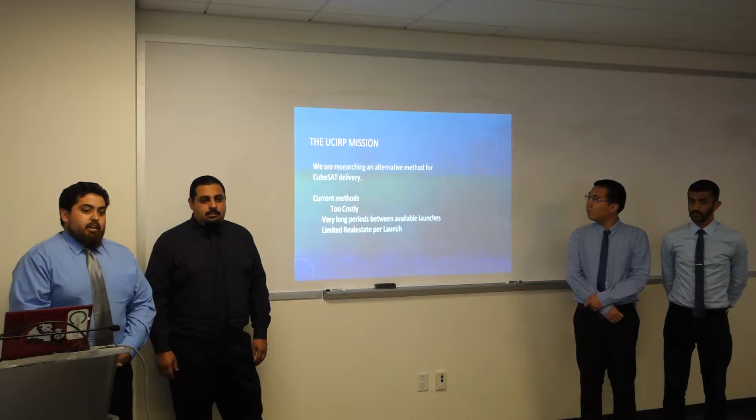Prior to other missions or other years, other groups would be satisfied with purchasing a solid engine and designing an airframe around that, then launching it for a tournament or a goal they have themselves, or for research purposes, such as what sounding rockets are for. But I wanted to make this mission geared towards more of a practical purpose.

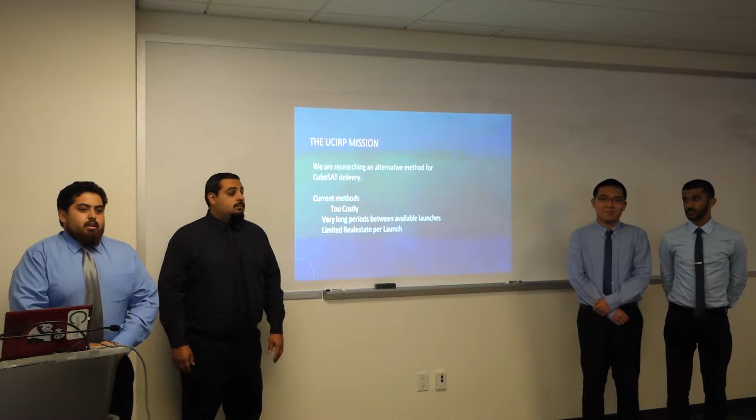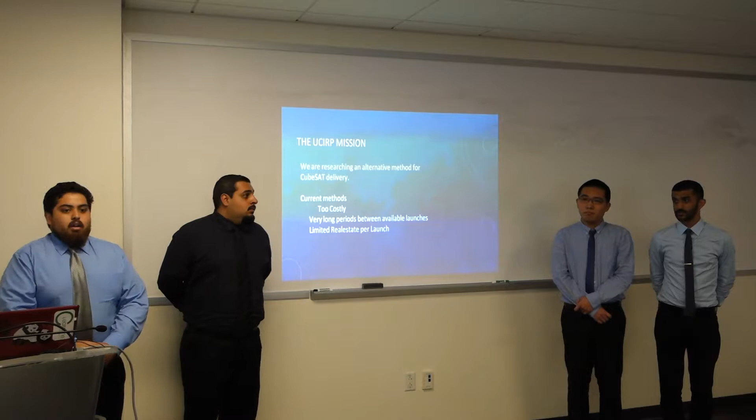Recently, CubeSats have been a big thing for industry places like SpaceX and Boeing. CubeSats are huge right now, and the delivery method for them has been constant. You would have to wait either 6 months to a year, and spend $80,000 to a couple hundred thousand dollars just to get a ride on a vehicle that's going to be used for some other project.

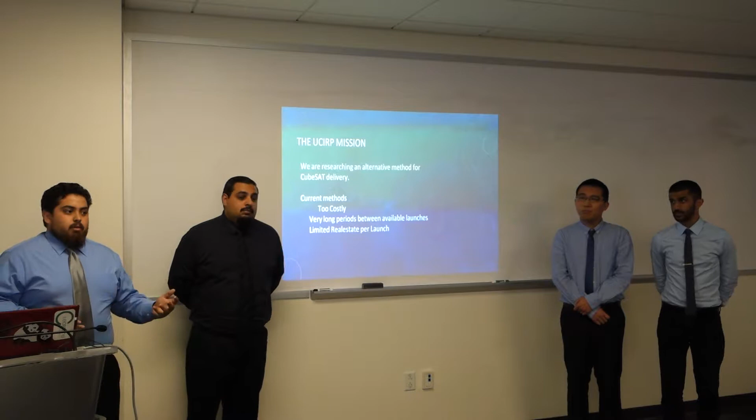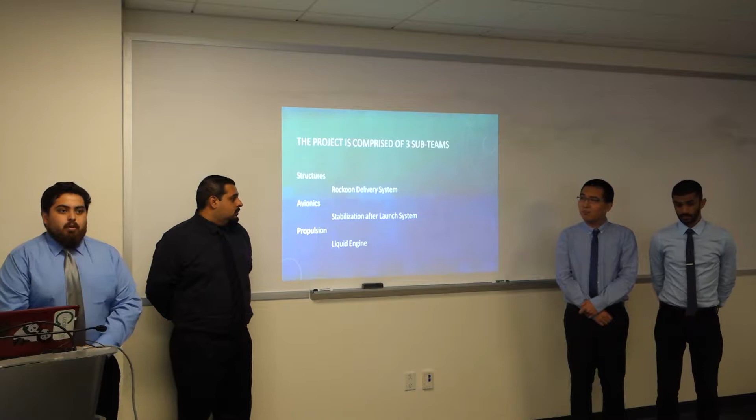So it's not really geared towards CubeSats themselves. Why not make one for individual CubeSats? The way we're trying to do this is we split our project into 3 different aspects: structures, avionics, and propulsion. The delivery system will essentially be a way of using a balloon hoisting a rocket vehicle with your payload that has an active stabilization system for correct trajectory, and a high efficiency engine to get you to your orbit.

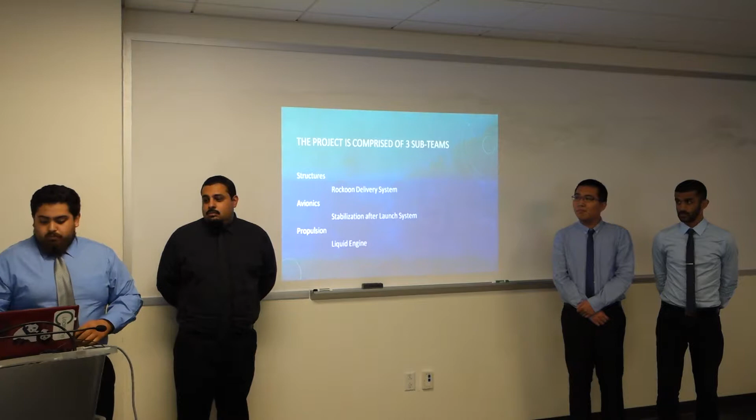So with that said, I would like to give Yuan the floor for structures. For the structure team, our goal is to develop a balloon delivery system. We have 2 different versions: the first uses a solar balloon, and the second uses a helium balloon. The solar balloon version is the best choice because of the extremely low cost and simple structure.

However, the use of the solar balloon is highly restricted by the area. The solar balloon requires a really high temperature gradient, which means the area needs a really low temperature and a lot of sunshine. For example, the South Pole is the best place to use the solar balloon.

In order to use the balloon system in other areas, we also designed a helium balloon version. This is our helium balloon version. Because we use a helium balloon, in order to carry a large payload, we need to use multiple balloons. The problem with using multiple balloons is that we cannot make sure each balloon has equal buoyancy force, so the platform might tilt a little bit.

So we designed a gimbal system to make sure the launch tower is always facing up. We also designed a truss structure to reduce the stress in this carbon fiber tube. This tube is connected to the balloon and is very long. For this prototype, the tube is about 8 feet long, but the diameter is only about 0.25 inches, so the moment is very large.

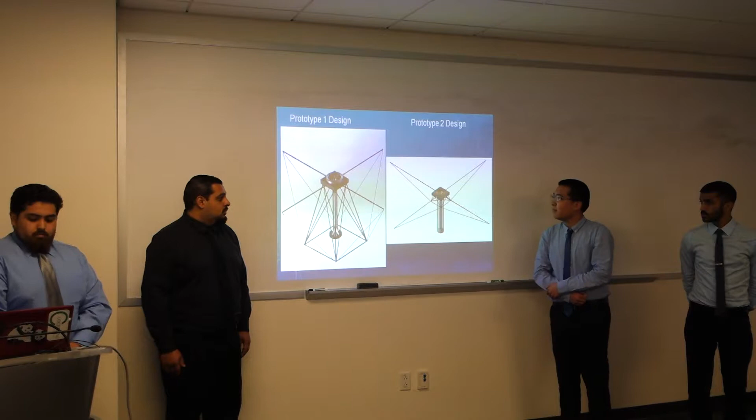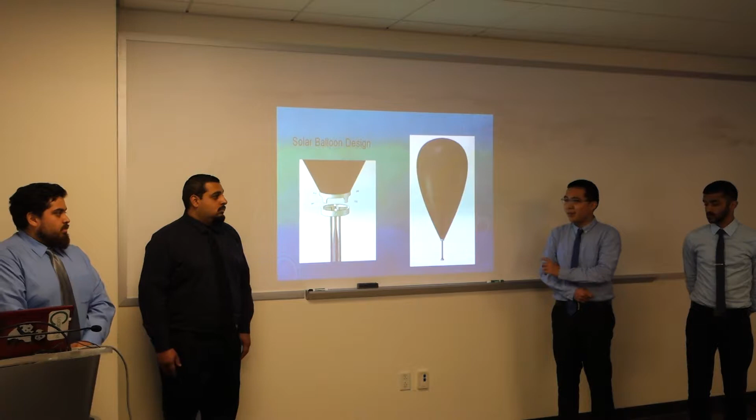So this is our solar balloon design. It's very simple, just a single solar balloon and a launch tower. We made the solar balloon using a trash bag, and it only requires the sun to heat it up. So the launch cost of the solar balloon version is only the cost of the trash bag and the rocket propellant. We don't use the gimbal system because from our experiments, the gimbal system makes the single balloon system less stable. So this entire system only has a trash bag and a single launch tower, which is very cheap.

So we need to add more balloons to carry the platform. We also had to design a rocket for prototype 2 in order to test the recovery and flight control system. In the future, we will design a larger scale balloon system to carry a large payload and eventually launch a CubeSat.

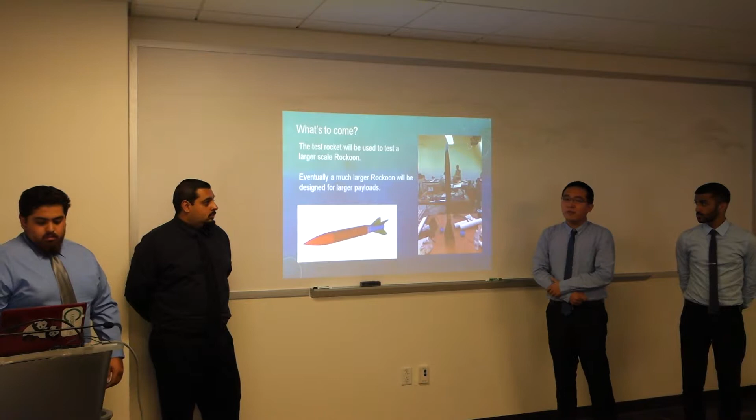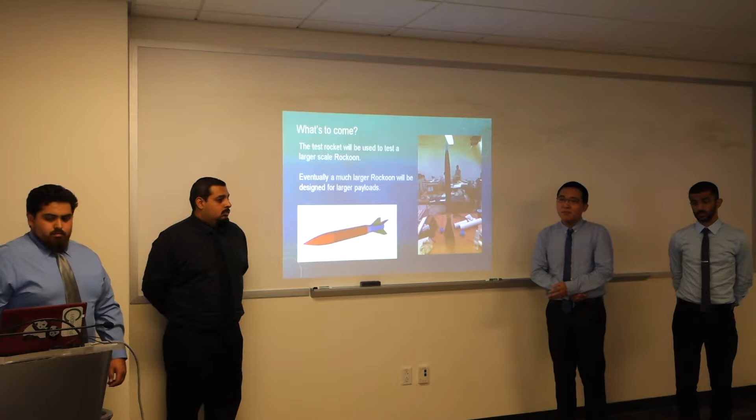From this year's project, we learned that 3D printing is a very powerful tool in prototyping. We designed about 6 versions of gimbal systems, and we don't need to spend time fabricating—we just change the CAD and print it out. For this rocket, the nose cone and the transitional part are very hard to fabricate with traditional methods, so we just 3D print it and wrap it with carbon fiber.

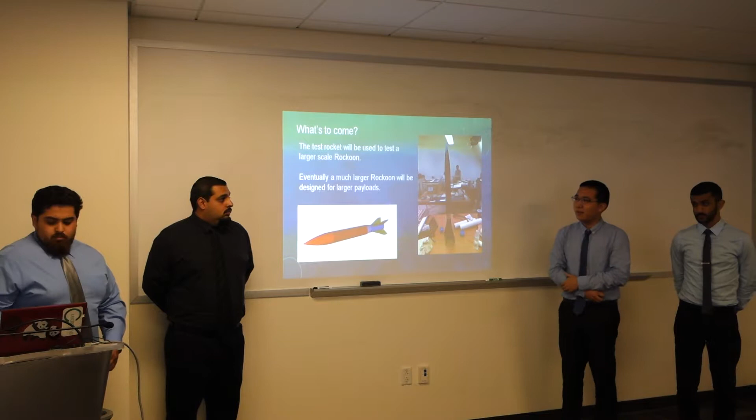Okay, so I'm the team lead for avionics. As Brandon said, we're doing active stabilization, which will be used after the launch from the balloon system that Yuan has been working on. The way we're going to implement this is by using actuated fin tips.

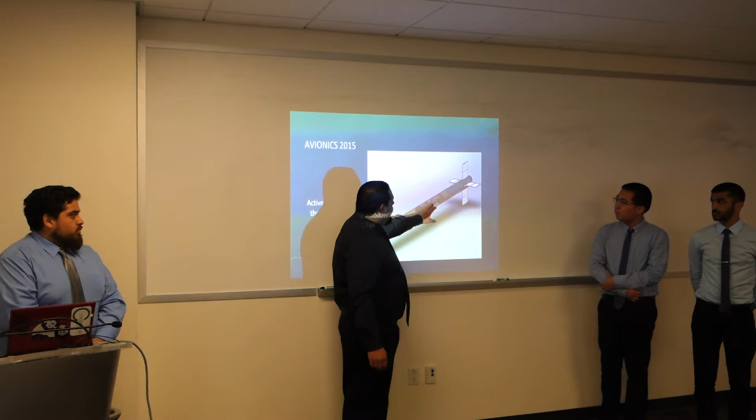You can kind of see here there are some motors. There's another slide that shows it better, but there are motors with linkages that go back to the fin tips, and they will be actuated using control algorithms and a microcontroller to implement that.

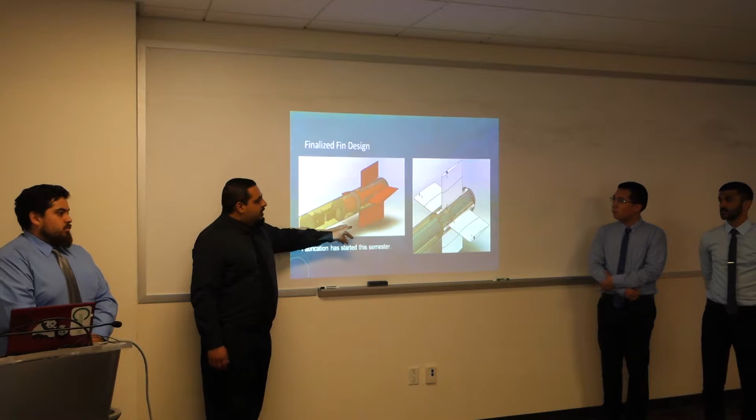Okay, on this slide you can see a little clearer on the back. This is an earlier version that we did. Initially we were going to go for full roll, pitch, yaw control. To simplify things and prove the concept of the fin design, we decided to focus on roll control first. That's why we decided to add these tips. These parts, the tips, will actuate, but the bottom part is stationary, and that gives us our stability in pitch and yaw, so we can just focus on roll.

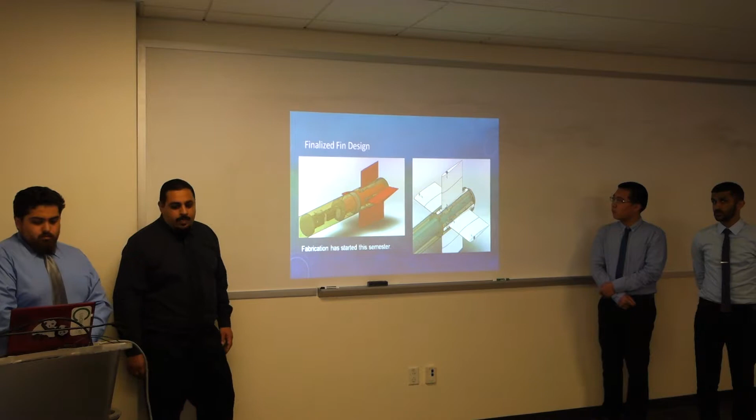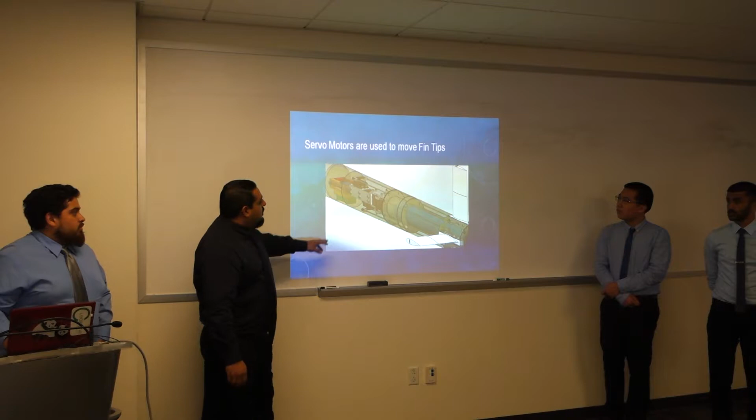You can see here we started fabricating this semester. On this slide you can see the motors a little clearer. The servo motors are here, the electronics are up here, and the fins are actually actuated through the rods, which use centering rings as guides.

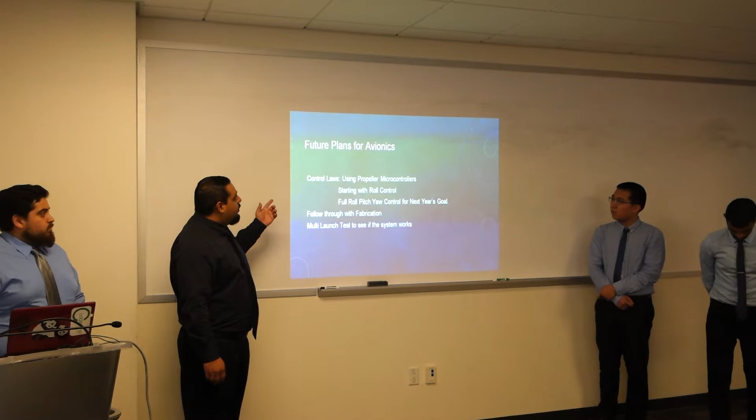Right now we're about 15 to 20% done with fabrication. We just started because the design work is very intricate in this iterative process. But in the near future, during the summer, we plan to launch. We still have to do the control laws and the programming and finish up whatever's left of the fabrication.

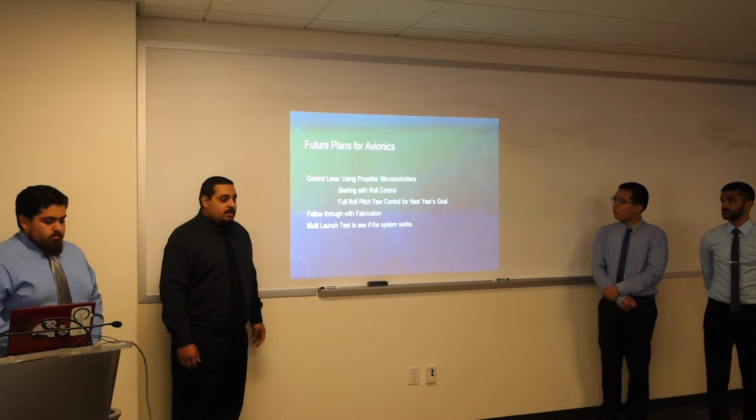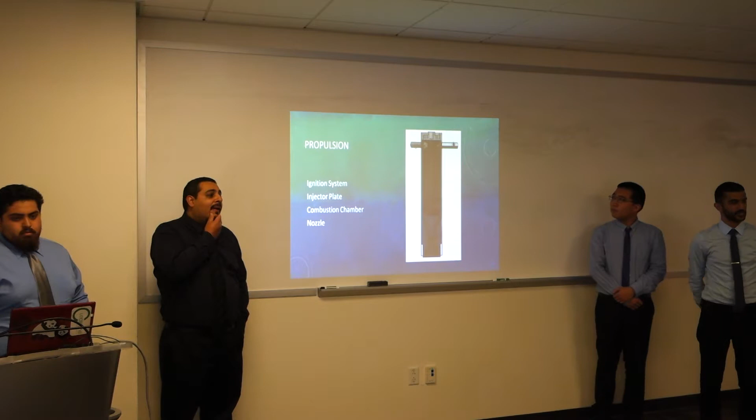Hey everyone, I'm Jesse, I'm the propulsion team lead, and just to stem off what Michael and Yuan talked about in terms of our launch platform, I was responsible for the lifting stage of our rocket system. Essentially this is UCI's first liquid rocket engine. It's meant to provide about 1,000 pounds of thrust, so enough to lift a small car.

The goal of this presentation was to really bring light to the lessons learned of our project, and it immediately became apparent when we were designing the liquid engine that there were some clear-cut government regulations we had to face. One of the first ones we faced was ITAR, International Traffic in Arms Regulations. Essentially it's a set of rules by the government and a bunch of other nations that define what's a military act and what's allowed for civilians like us.

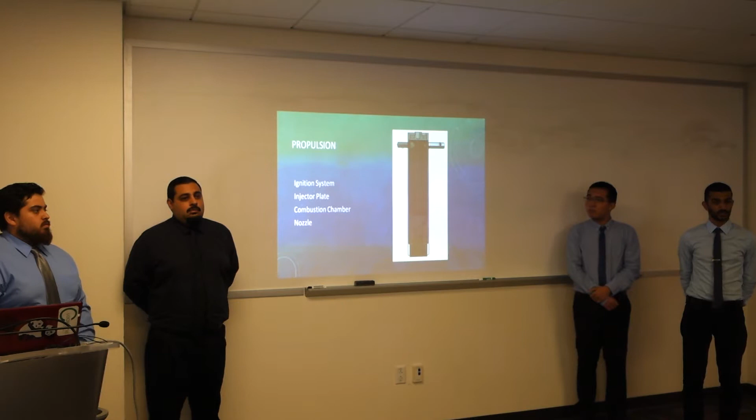So when we initially designed the engine, it was utilizing kerosene and hydrogen peroxide. Unfortunately, hydrogen peroxide, anything over 80% grade, is regulated by the Army, so we don't have access to it. Another form of regulation was our launch mechanism, in that the act of transporting a satellite into space is a military act. So we were limited in terms of what we could design this engine around. Right now, as it stands, it's going to be a kerosene and LOX, a liquid oxygen-based engine, and it's only meant to achieve a maximum altitude of 80,000 feet. That's simply a consequence of the ITAR regulations that we face.

In terms of what we finished from the beginning of the year, we went through the ignition system, the injector plate, and the combustion chamber, as well as the nozzle, and all of that was designed in accordance to the ITAR regulations that were set forth. As of today, we have the nozzle, combustion chamber, and ignition system taken care of. All we have left to do is take care of the injector plate.

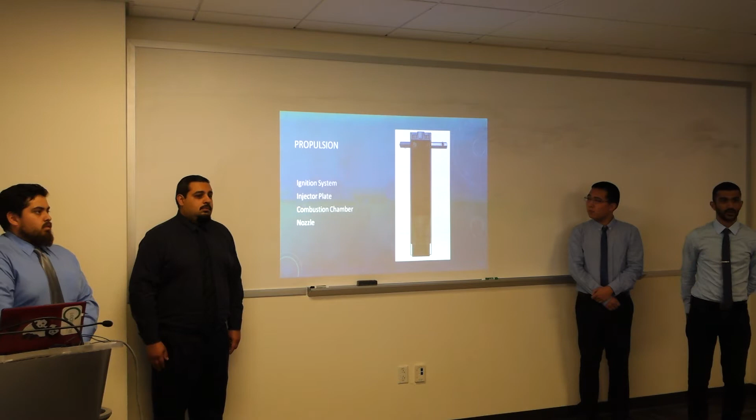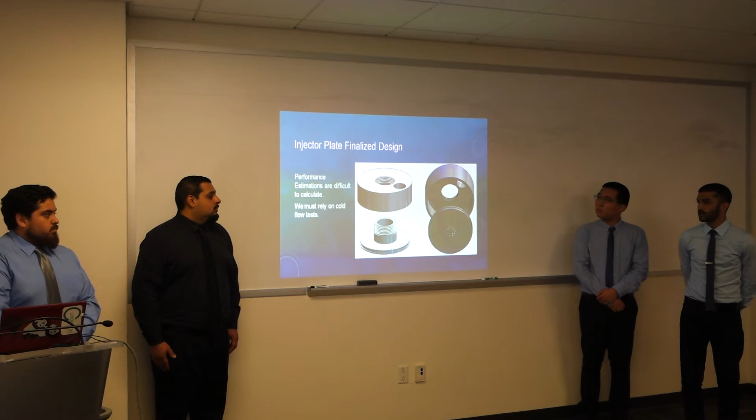Just to briefly go over lessons learned in terms of the injector plate design, we faced a lot of design constraints in terms of optimizing the overall design of the injector, in that theory doesn't always equate to the results that you want to see, and the only way you can get around that is actually practically testing this out. So what we're looking to do is fabricate this professionally and go out and carry out some cold flow tests. Essentially that means supply liquid oxygen or kerosene through it to try to determine the overall losses due to the flow through the injector.

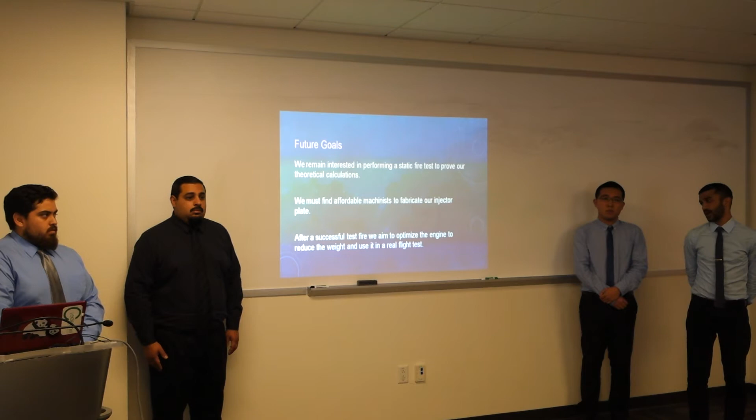Future goals: the goal of this propulsion team's project was to become UCI's first liquid engine rocket. More or less, we wanted to provide some data for our structures and avionics teams to design around and see whether or not we were able to determine the 1,000-pound target that we had designed around. A major lesson learned was that we couldn't find easy access to machinability on campus.

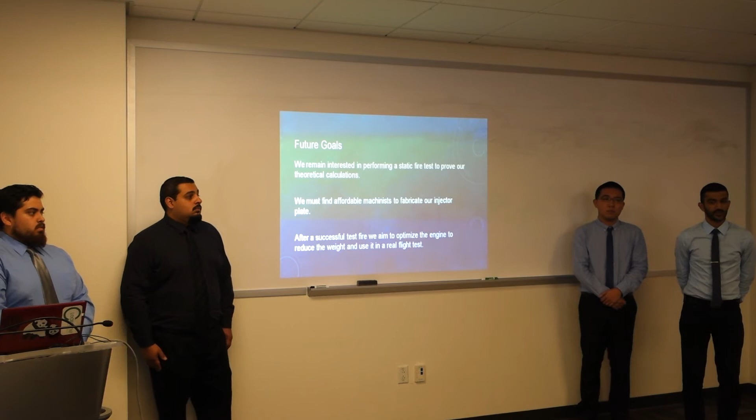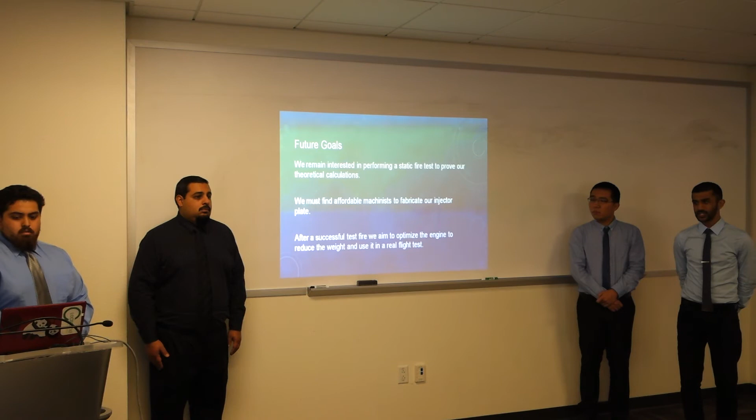We had to heavily rely on professional manufacturers. Outside of that, we still aim to really optimize the overall design of the engine and really try to shoot for a really cheap, affordable space launch system for CubeSats.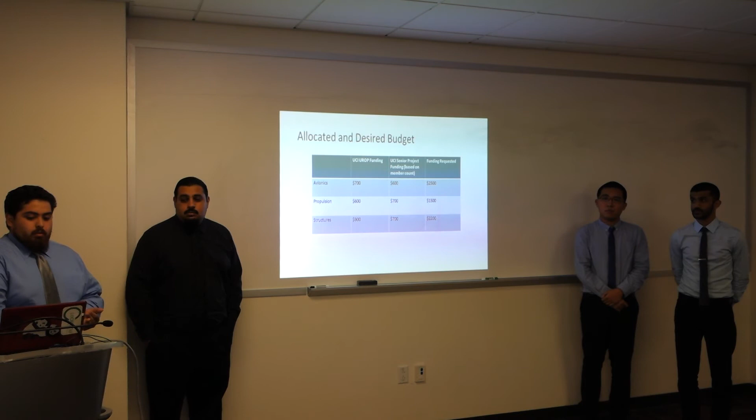To put it into perspective, the budget that we had was a major constraint for us. We've asked for over $4,000 of budget just to do these basic things we wanted to, and we've been able to work within that range so far. Granted that we're not completely done with everything we want to do this year, but some of the issues I just want to recap were a budget constraint and limited access to machining.

A major thing was our facility. We've been moved around—our lab has been moved around 4 times in the last 2 years, and it's never stable. Sometimes we cannot even use it to fabricate things due to dust created when we actually work. We've also had purchasing errors; the purchasing office has made errors and actually cost us money in the process. And also one big thing was a lack of a full-time mentor—we don't get a full-time professor to help us out, since the professor is chairman and we don't want to bother with that.

But one thing that I've learned as a lead for this is that organization and communication is key. Every other day, I ask my team leads: what have you done? What are you doing? What are we going to do? And then the same thing with them—I hope they're asking their team members the same questions. Just as Terry has asked me: what have I done? What am I doing? And what am I going to do?